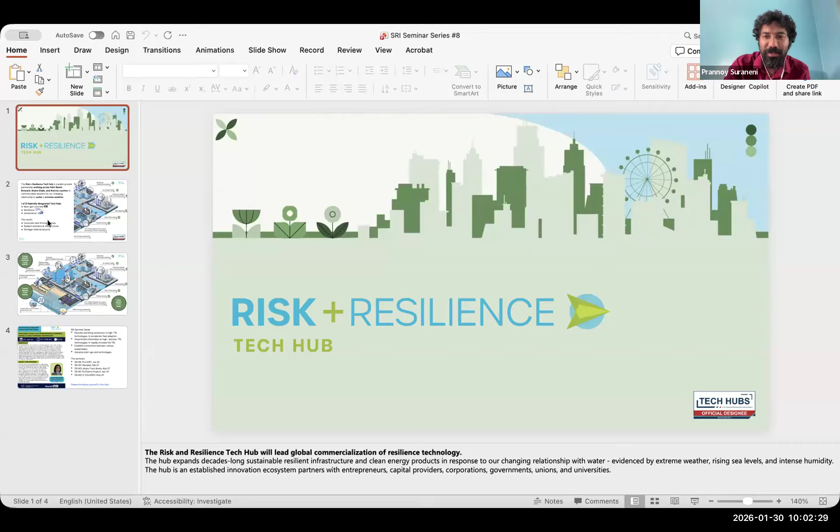Most of you know this quite well by now, but just in case you don't, the Risk and Resilience Tech Hub is a public-private partnership working across the four-county area. The idea is that we commercialize solutions to our changing relationship to water and extreme weather. On the right, you can see the areas the Tech Hub works on, a lot of it related to reducing barriers to adoption of technology such as resilient concrete, advanced materials, clean cement fabrication, wall of wind testing, and providing testbed services. It's one of 31 federally designated tech hubs, and the projects and leads are given in the slide here.

Ultimately, this is all about economic development. I want to clarify that this isn't a research project per se, but also to develop our workforce to result in good jobs, thriving startups, a resilient economy, and stronger national defense and security. This is a broader picture of what the Tech Hub is interested in, with a number of things related to concrete, coastal, and energy efficient buildings. If these interest you, come talk to us, come work with us. We're always happy to assist and to make connections, and we're always interested in growing the South Florida ecosystem and economy.

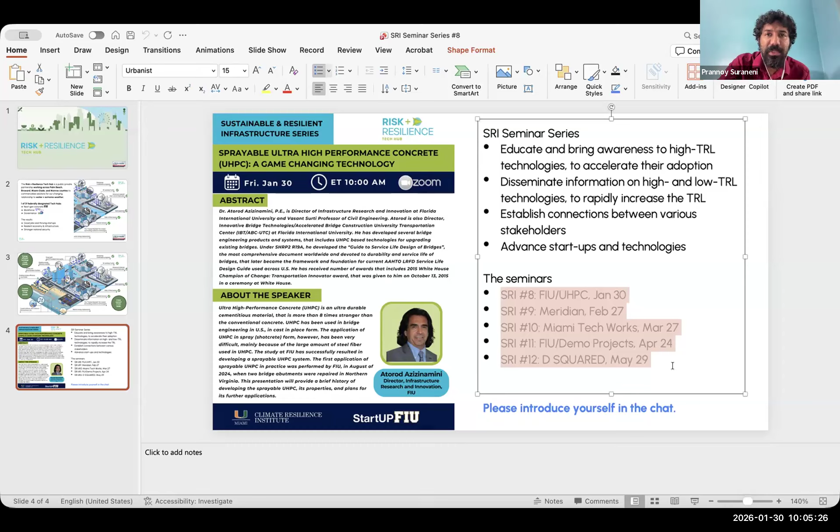All right, thank you, Prannoy. So I hope to show you my slides in a minute. What we are going to discuss is sprayable UHPC in detail, but I'd also like to give you some background on ultra high performance concrete, what it is, then go toward the applications, the properties, and then the sprayable UHPC, to give you the story of what UHPC was and how we got to the sprayable UHPC, which is really game-changing technology in my opinion.

At the end, I'd like to leave time. Actually, I'm going to watch my presentation time because I like to have some time so that we can have some dialogue. I'm pretty sure there's going to be some questions, and I will do my best to answer. If you don't get a chance, I'm going to leave you my email address and contact information, so by all means, please reach out.

Now, UHPC, ultra high performance concrete, has probably had more application outside the US, especially in Europe, and now in countries like Malaysia, and I will show you some applications. So before I dive into the material properties and so on, which is going to lead me to the sprayable UHPC and the 3D printing and all that, I wanted to show you where it's been used.

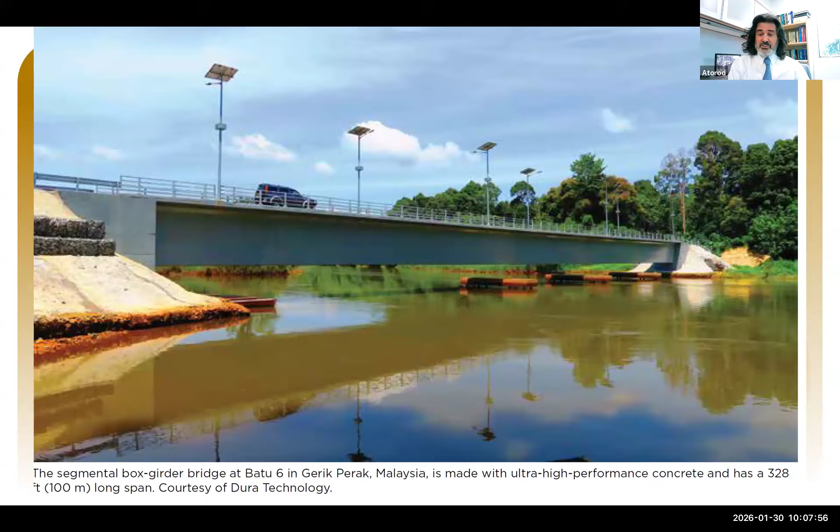Malaysia, actually, believe it or not, is one of the countries that have used UHPC quite a bit. In fact, Dr. Voo, who owns a company in Malaysia, told me just about a month and a half ago that they have constructed more than 400 UHPC bridges, which is really mind-boggling. I think they've constructed more UHPC bridges than anybody else in the world. This is one of them, a long one, 328 feet long girders. So how they transport that to the site is a very interesting question.

In the US, the Federal Highway Administration actually has an interactive tool, and I'm going to give you the PDF copy of all my presentation. You will see a link to the US DOT map that shows data by year. You can plot the data in different forms.

You can see how many bridges have used UHPC in one form or another. Sometimes it's just closure joints, sometimes it's for minor repair, sometimes it's just a whole girder, sometimes it's a deck and so on. I don't believe the FHWA is even able to keep track of it anymore. After 2015-16, it really just blossomed, so it's everywhere basically.

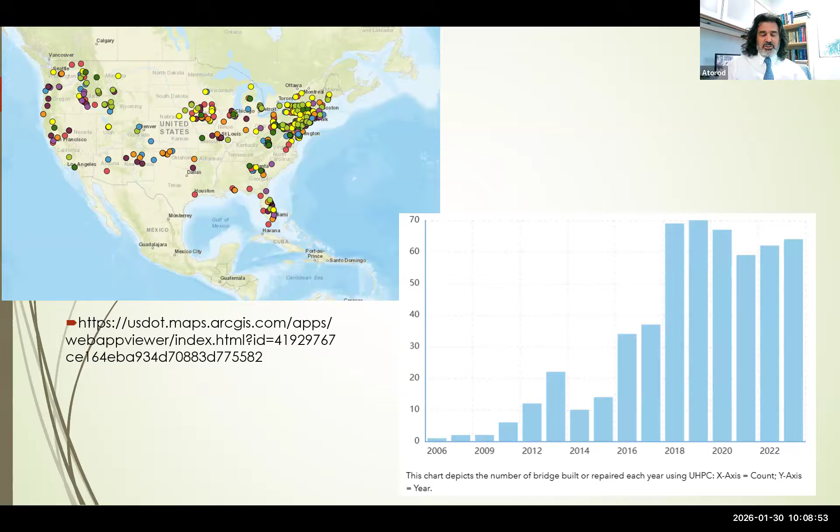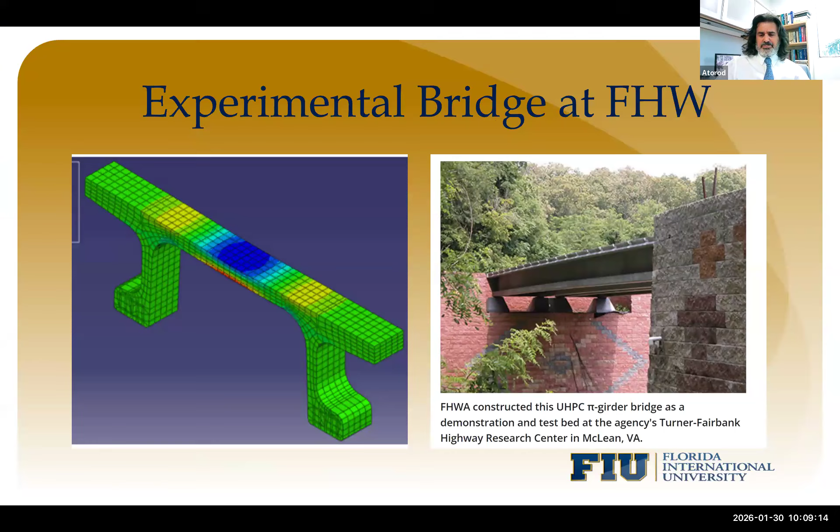Back in 2006 or so, it was like a demo project, but not anymore. If you happen to go to Turner Fairbank in the DC area, there is a so-called Pi Bridge that I think was developed by faculties at MIT. They have that bridge as a demo, kind of. One of the first ones constructed in the US in the bridge area was in Iowa.

UHPC has been used extensively in the bridge area right now, so the bridge owners are very familiar with it. It hasn't really found its application in the building area, even though I think UHPC is going to have more application in the building area than the bridge.

In fact, with the help of two very established high-rise building designers, we redesigned an existing 42-story building that was designed using conventional concrete. We redesigned it using UHPC, and there is significant economy. The size of the shear wall, the column size and things like that goes down. More importantly, the total weight goes down, the foundation size gets smaller. When the size of the columns and the shear wall gets smaller, then the rentable space is increased, and the architects and owners love that.

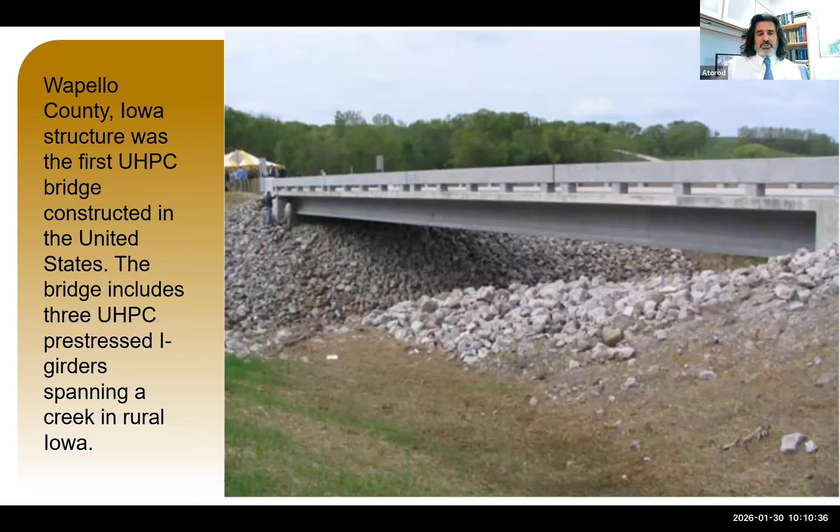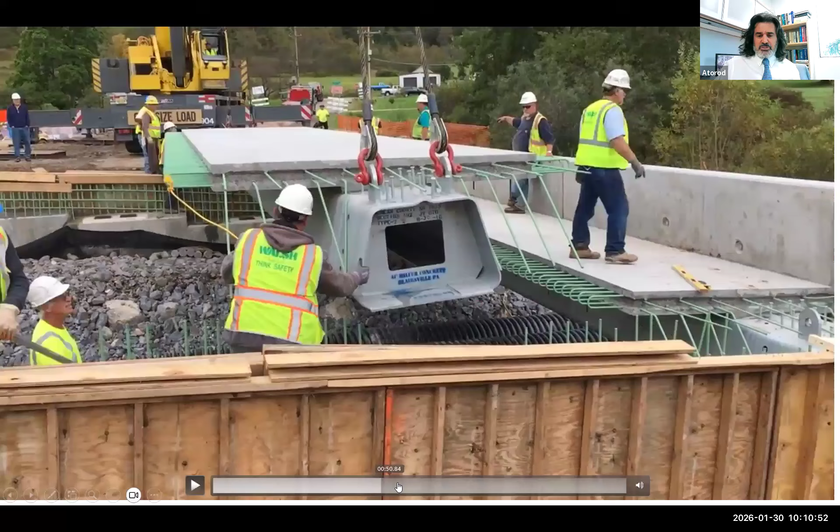So I think it's going to have more application in the building area rather than the bridge, but it hasn't found it yet. In the case of the bridge, it's been used mainly for closure joints. Basically this is the ABC application where you bring this big segment of the bridge that you construct offsite, and then you put them side by side and join them. This is one bridge that we developed, a job in Pennsylvania.

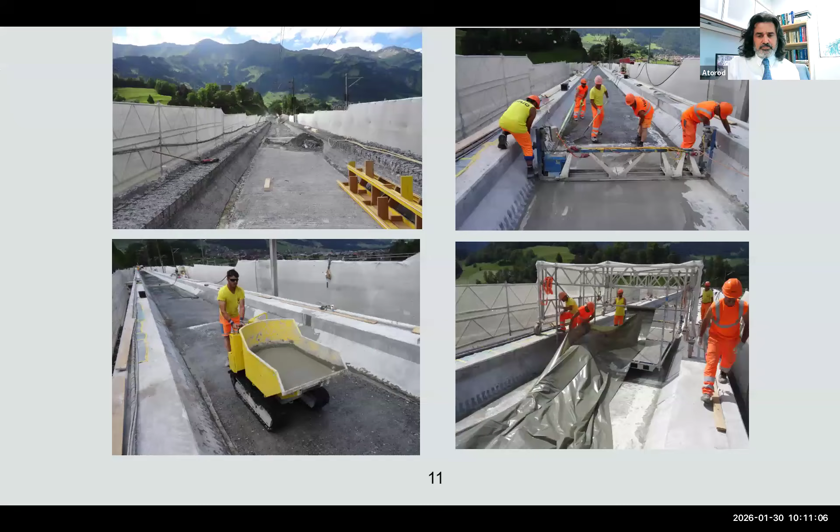In Europe, they have used it for retrofit, the cast-in-place version, not the spray. Cast-in-place - when you wrap an existing bridge or column with UHPC, the end product sometimes becomes even much better than the original structure, because the material is very durable, and we will discuss that, and it is very strong. We are talking about 25, 28, 32,000 psi concrete in 28 days.

I went scanning in Switzerland, because a good friend of mine, Eugen Brühwiler in Switzerland, is one of the pioneers in the UHPC area, and he showed me some photos - for example, the one on the left-hand side is a liner. They put a UHPC liner, and it's basically stored in hazardous material. It's very flowable - you can see it's very flowable. You don't need to vibrate it or anything like that. This is a cast-in-place application.

We're going to discuss the sprayable version, which is really the game-changing technology, like we said - retrofitting the columns, things like that. There's a tremendous amount of application. So let me give you some introduction to it.

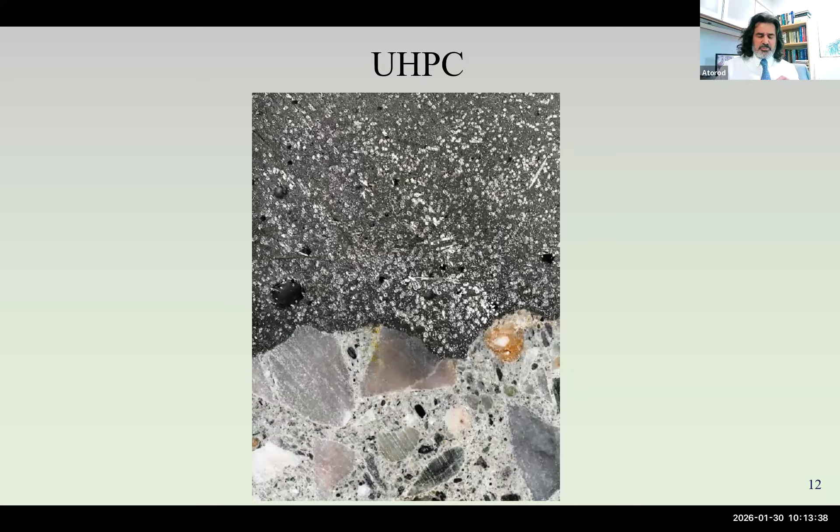Very strong. About a year and a half ago, Hyperfiber, who provides the steel fibers in Detroit, Michigan, added a little bit of a dent on the steel fibers, but previously it was just smooth. There is a reason why it shouldn't be like a hook at the end, and so on. If there's time, we can elaborate on that.

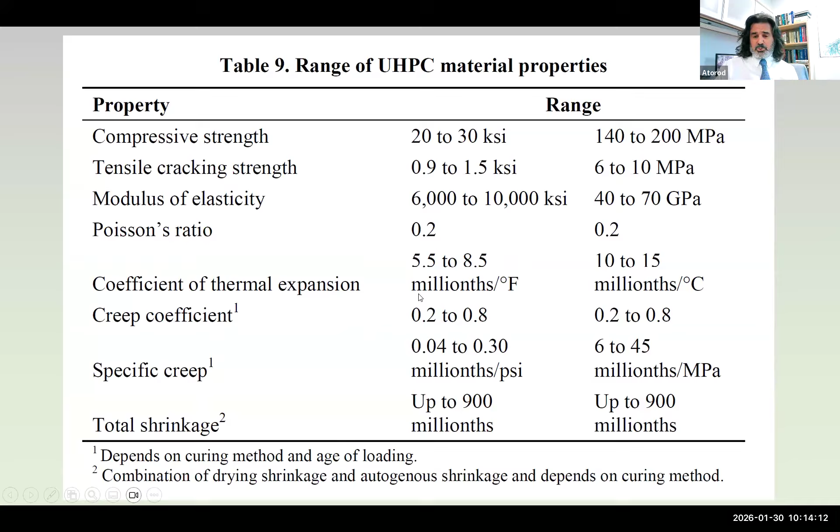Properties - again, I'm going to give you a copy of the slides, I'm not going to go through everything, but look at this: the tensile capacity is very high, compressive strength is very high. There is shrinkage involved with this, a little bit higher than conventional concrete. Specific creep is a little bit lower, which is good because there's not that much water in it. Thermal expansion coefficient is a little bit high compared to conventional concrete. So I'll give you some properties, you can look at it.

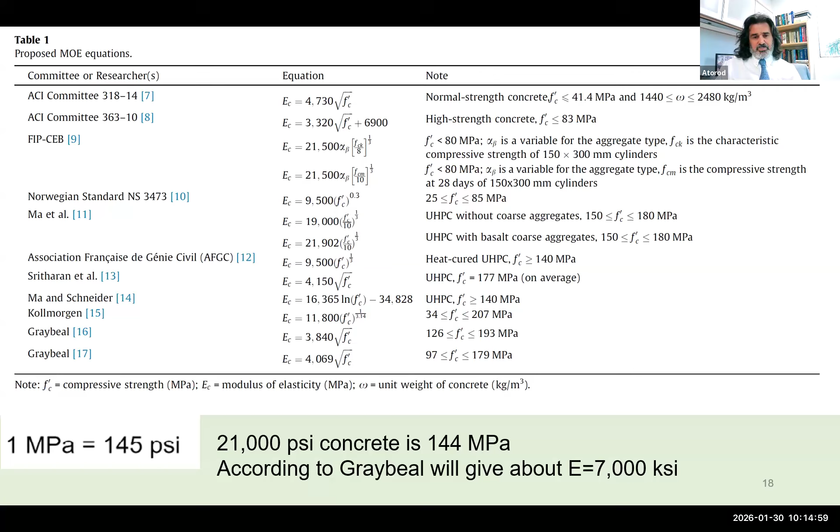One of the main aspects of UHPC is that its modulus of elasticity is very high. You can actually measure the modulus of elasticity if you want to apply it to a building. If you measure it, it's going to be higher than what some of these equations around will give you. We're talking about a modulus of elasticity of like 9,000 KSI. So when it comes to a building, the drift of a high-rise building is very important, and the modulus of elasticity plays a major role. That's where the major advantage of UHPC comes in for building applications.

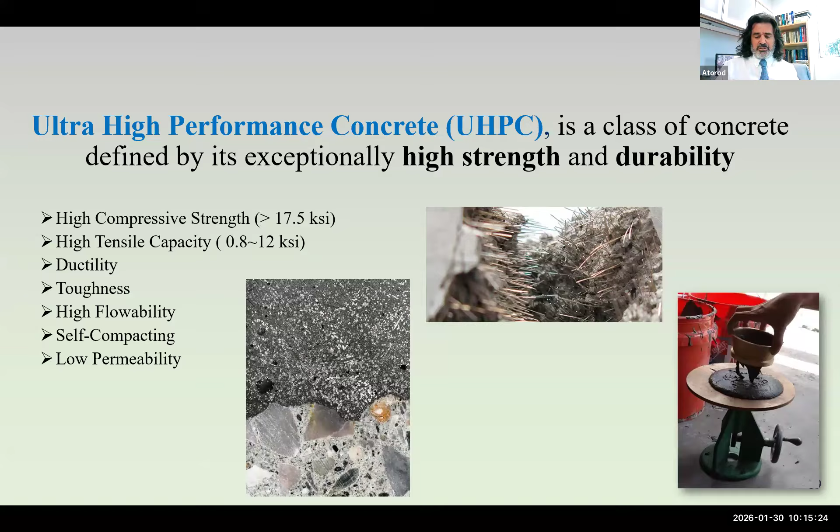In the US, according to the Federal Highway Administration, we define UHPC as a concrete that has good tensile capacity, post-cracking capacity, and a strength not less than 17.5 KSI. That's how it is defined in the US now.

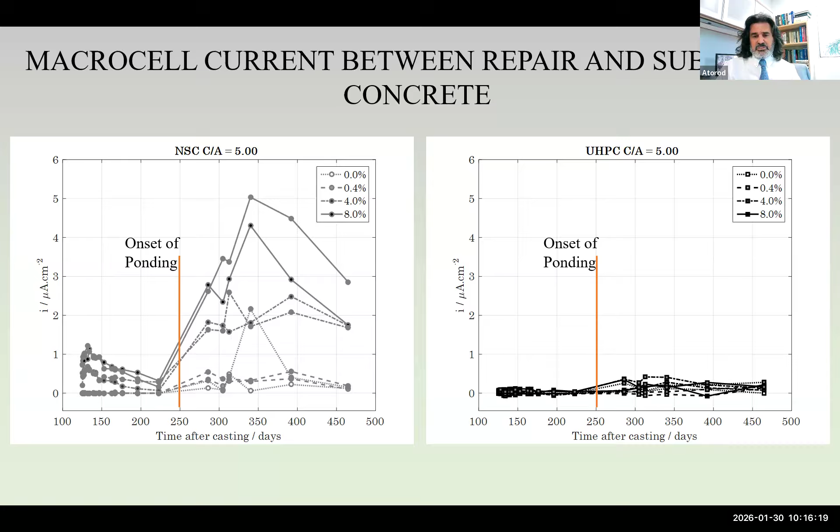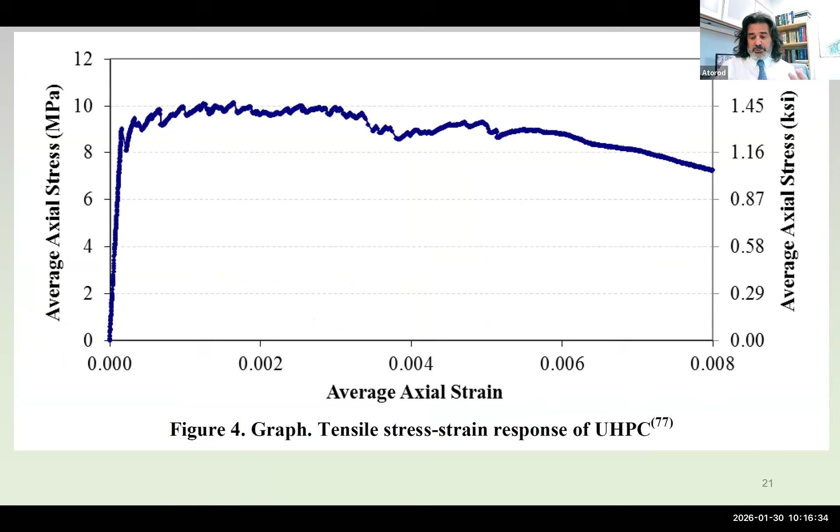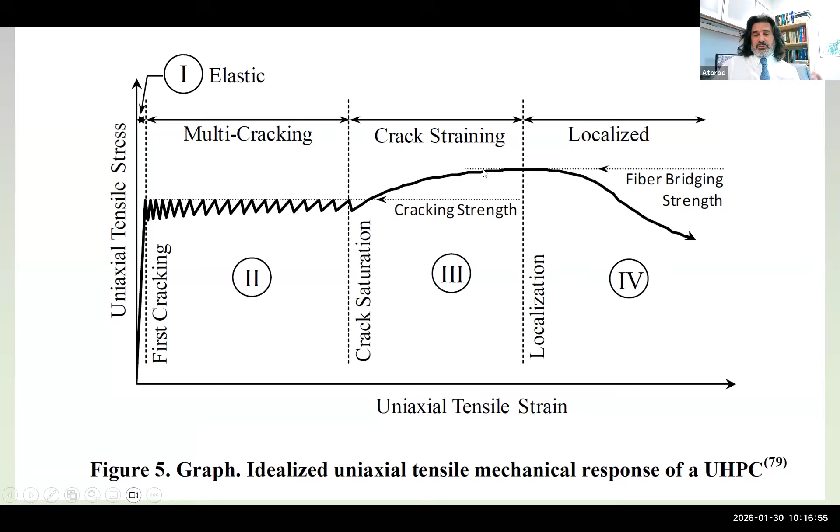The other aspect is that once UHPC cracks, because there are lots of steel fibers in there, those steel fibers hold onto the crack and don't let it open until one crack takes over. Here is a stress strain curve - you can see that once you load it, there are multiple cracks, and then one crack takes over. That's when we calculate the capacity of the section. I can show you here.

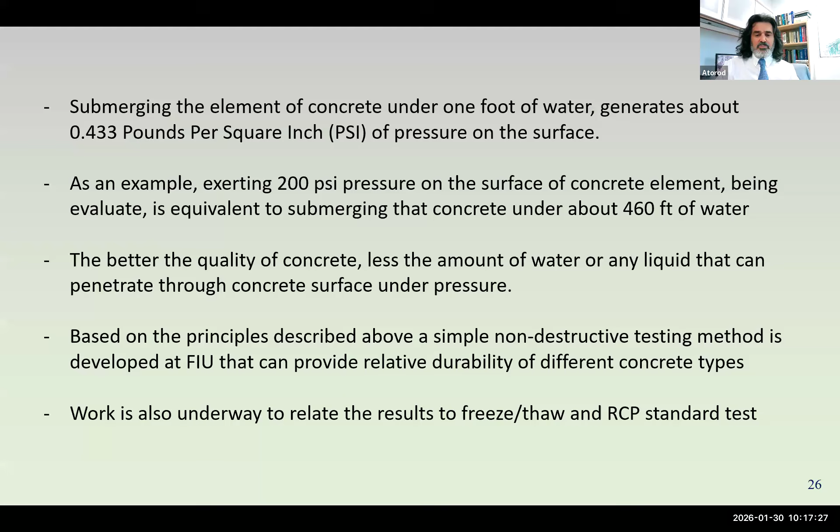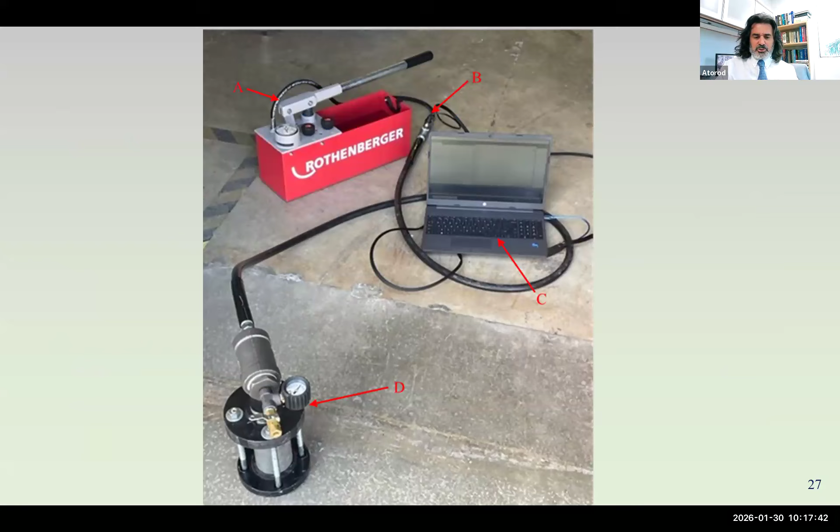Let me give you some idea on durability. We have developed techniques where in 10 minutes you can evaluate the relative durability of different types of concrete. What we do is take a cylinder and apply very high water pressure to it, then watch how the pressure changes over time. If you put a cylinder under 1 foot of water, that creates about 0.433 psi pressure. So if I apply 200 psi pressure on top of that cylinder, that's similar to putting it under 460 feet of water. We tested a cylinder made of UHPC and one of normal strength concrete - take a look.

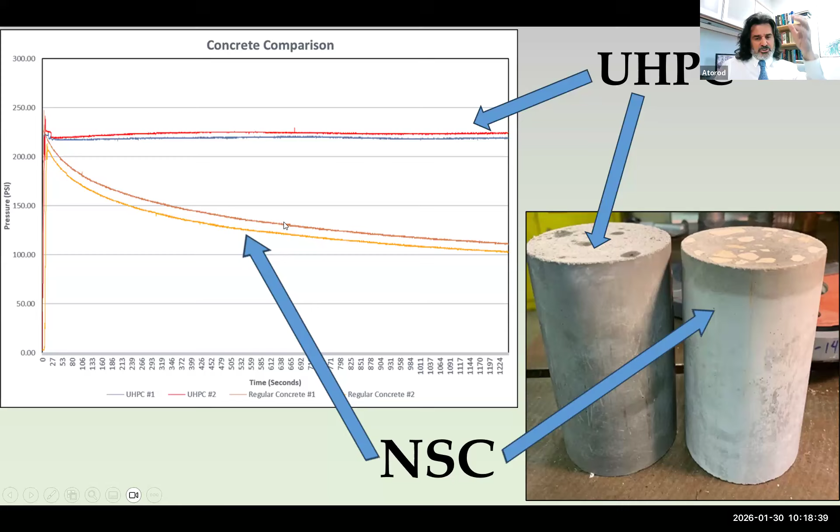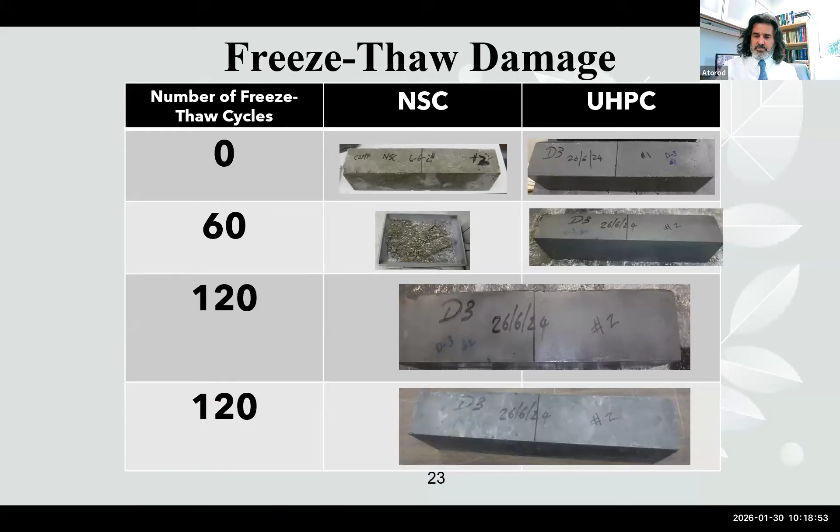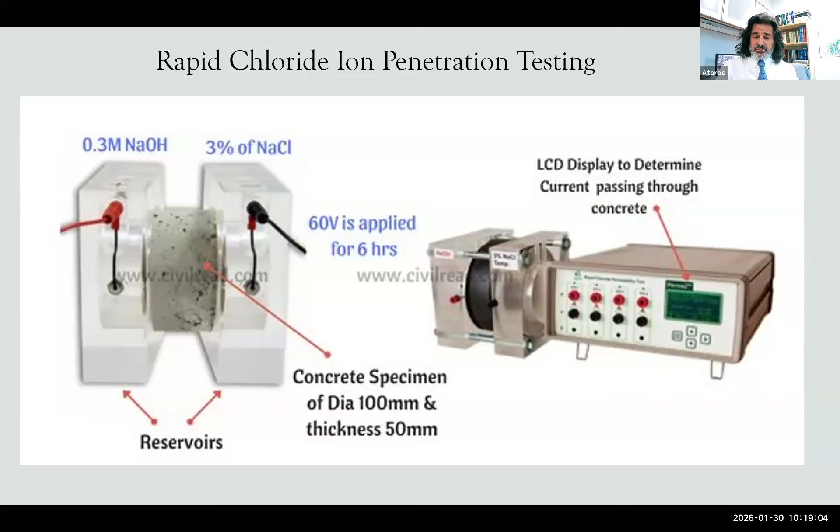With UHPC, you apply 200 psi water pressure, and over time it doesn't change. Whereas with normal strength concrete, the water just seeps through. That's why UHPC is durable. We've done lots of freeze-thaw tests - after even 365 days, 400 days, there's absolutely no change. Now in Florida we don't worry about freeze-thaw, but in the Northeast we do. Very durable material. We've done tons of rapid chloride permeability tests, with basically the same results.

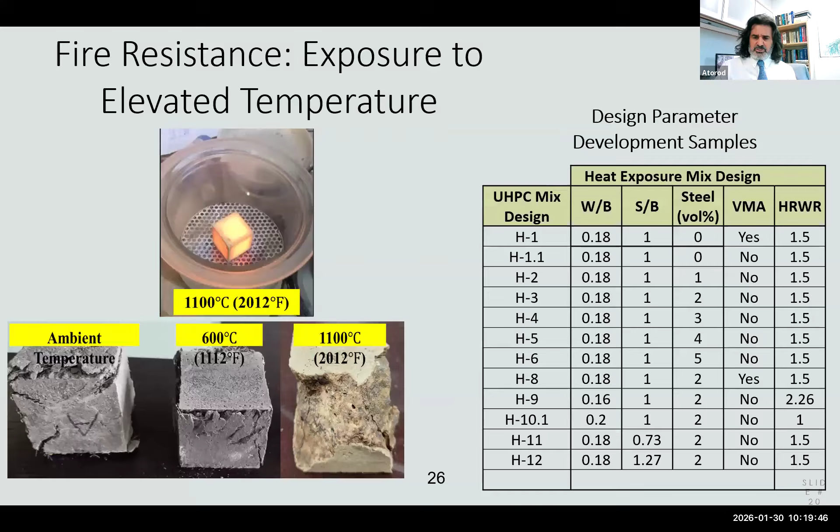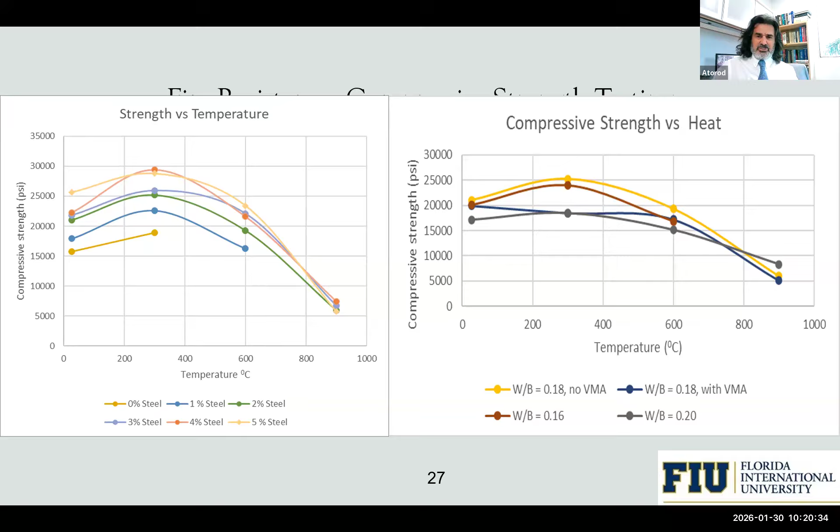We've done a relatively small amount of fire testing. We don't know the mechanism, but if you cook small cubes of UHPC up to 300 degrees Celsius and then do a compressive test, the compressive strength actually increases. But if you cook it more than, say, 800 degrees for a couple of hours and then test it under compression, the compressive capacity does go down. Some of our colleagues in Canada called us and they've seen the same thing. There's some explanation for the mechanism, but the work we've conducted on fire is still relatively small.

There's more work needs to be done in that field. So let me show you some of the applications.

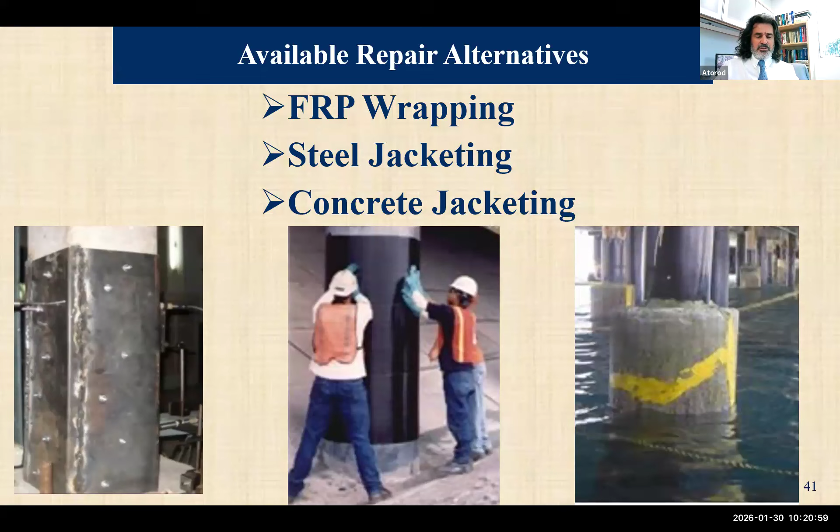Partial repair of the concrete column. We've done tons of testing. There are some ways to repair columns, let's say bridge columns or building columns. You can wrap it with FRP, with concrete, with steel elements. But one way is to wrap it with UHPC. So we've done lots of testing with this.

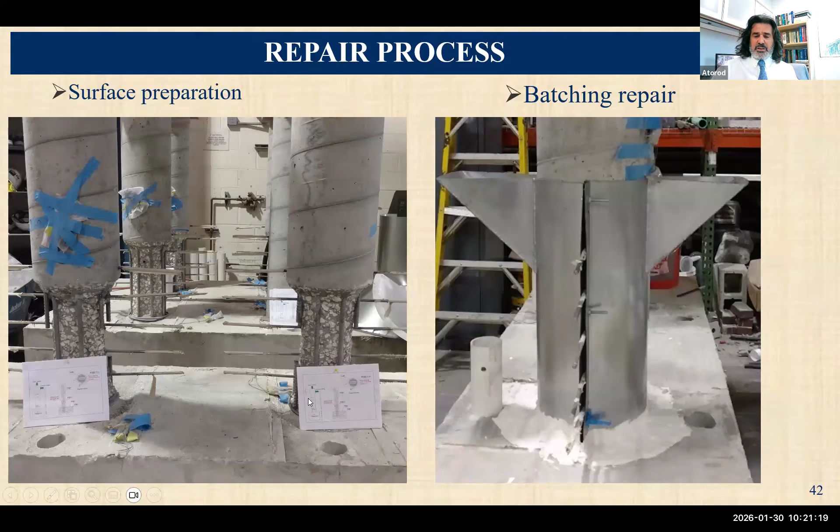One thing we found out is that, for example, you can see some specimens where intentionally we didn't cast the bottom portion, representing some damage, and then we wrapped it with the UHPC. One lesson we learned is that any place you wrap the column with UHPC, if done correctly, you shift the damage above that area, because UHPC is so strong it doesn't let damage happen there. You do get some hairline cracks, but you shift the damage elsewhere, above or below.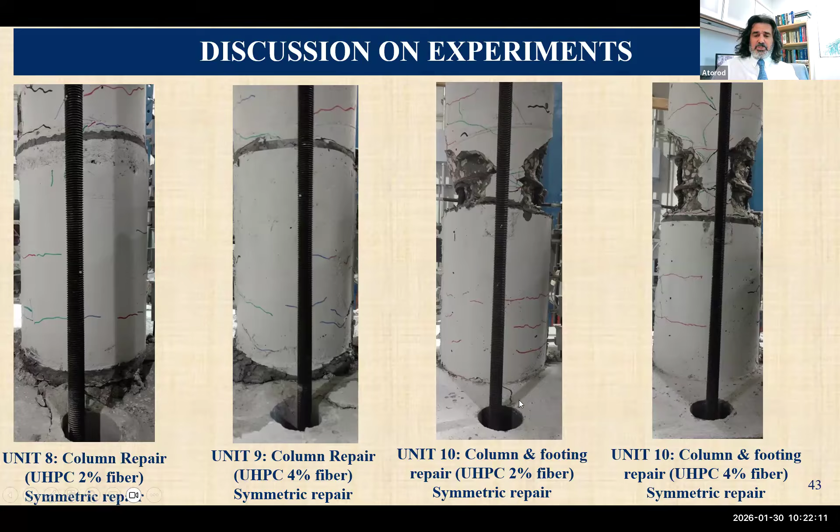That means if you retrofit a column, you also have to retrofit a little bit around the base. If you don't, you see the left-hand side? In fact, we learned it the hard way. In the left two columns, we didn't retrofit the base, and the failure was in the base because that's where the maximum moment is. Then in the next two, we also repaired the foundation, and then we shifted the damage above.

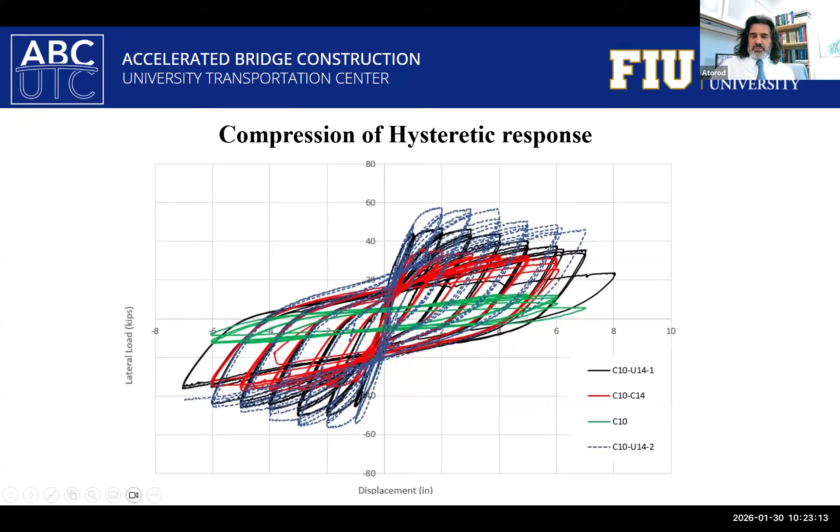So let me show you some results. Here you see a load deflection curve. The green line is a 10 by 10 inch reinforced concrete column. The red one is if I wrap it with normal strength concrete, a couple of inches. And then the black and the blue are if I wrap it with UHPC. So you get the ductility, you get the strength, very nice behavior.

One very interesting work we are just starting is on steel columns in buildings or bridges that need to be retrofitted, maybe due to corrosion, or maybe the function of the structure is changing and you need to beef it up. So what we're trying to do is take a steel column—this is actually a test specimen we're going to be casting very soon.

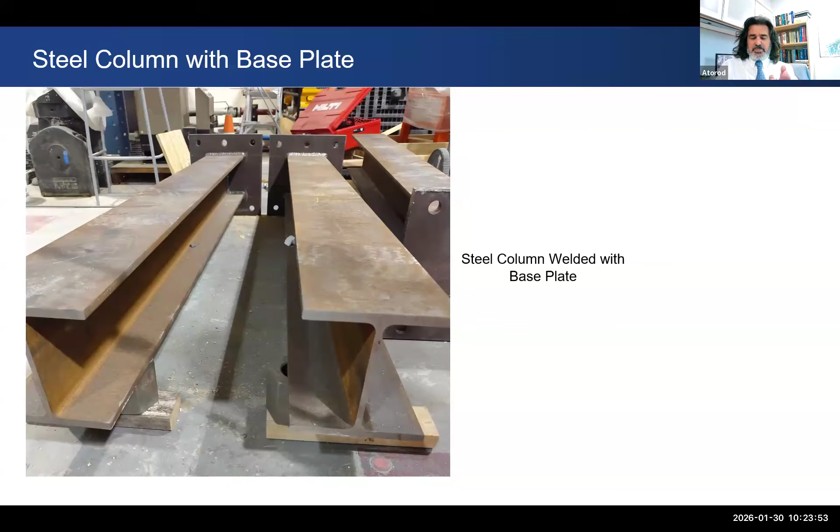We are going to spray the steel column with UHPC. But before we do that, we're going to wrap the cross section with the UHPC, but before doing that, we're going to add some longitudinal reinforcement and also some stirrups in a shape that goes around the column. Once it's ready, we're going to test it. It's going to be a very interesting test. We're going to do at least two tests to start: one, cast the UHPC; one, spray the steel column with UHPC after placing the longitudinal reinforcement and stirrups. Very interesting.

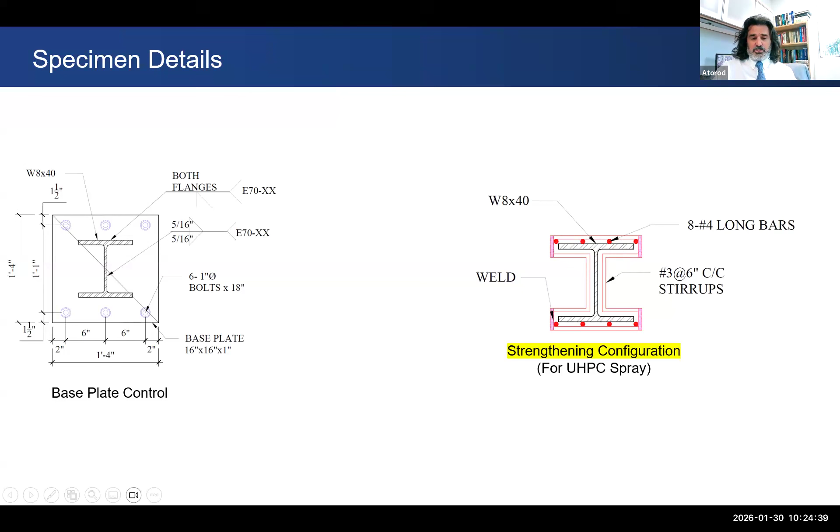I've not seen any work similar to this, but it's coming up. And here is a specimen—the foundation of it is ready to go.

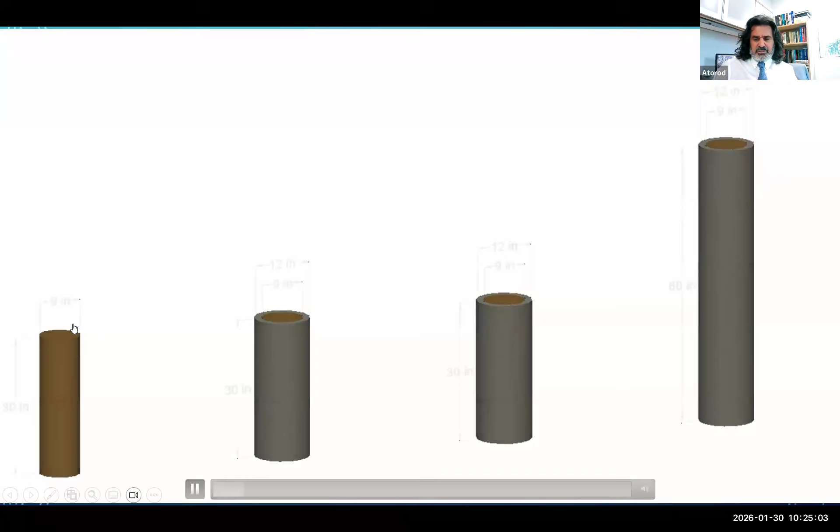Another experiment we've done is strengthening timber piles with UHPC. Again, this could be done cast in place or sprayed. We took, I think, a 9 inch diameter timber pile. When tested without any strengthening, we got in this case 345 kips. Then we wrapped it with 1.5 to 2 inches of UHPC.

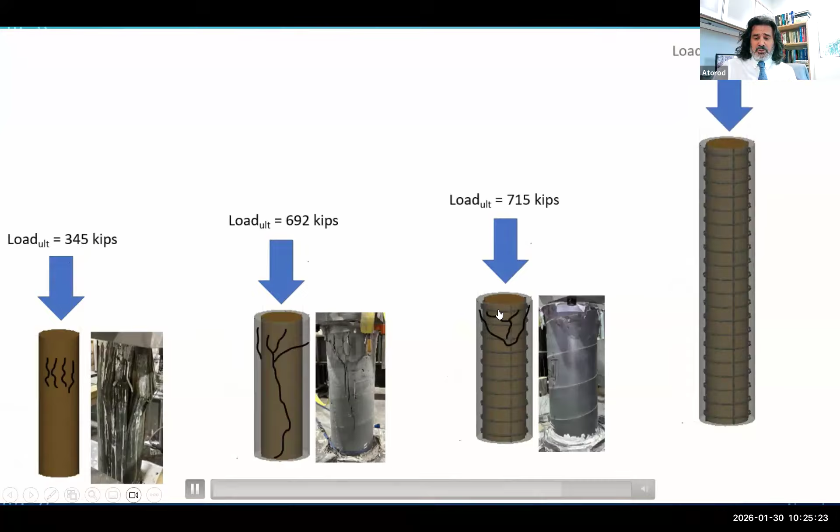With no reinforcement, we got 692. Then we added a little confining reinforcement and got 715. We also looked at the length effect for long columns. So you can see that wrapping a timber pile with just 1.5 inches of UHPC takes you from 345 to 715. So this has an application—we can spray it, we can cast it in place. It's very fast, and it can increase the capacity by 2 times, and you can also use the timber pile as formwork.

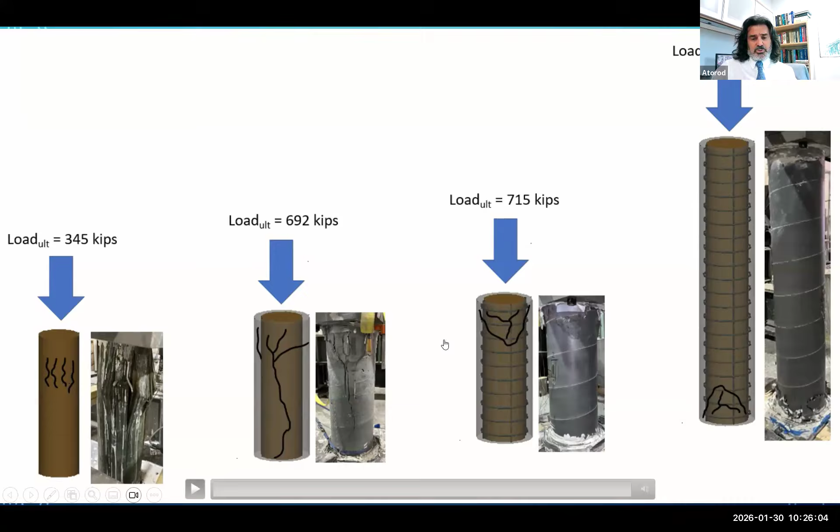And even if the timber piles are in bad shape, don't worry about it, because you can rely on the strength coming purely from the UHPC, not from the timber piles. We've done quite a bit of testing trying to strengthen the beams, the flexural capacity of the beams.

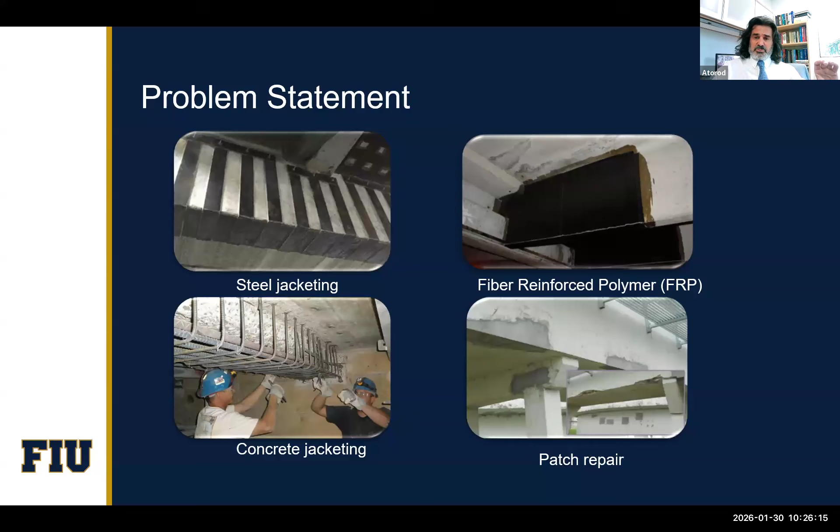There are many ways of doing it, we played around with this 5-6 years ago, more than that actually. We tried to see, okay, if I have a damaged area, what do I need to do in order to get the UHPC to be attached to the normal strength concrete? What we found out is that we tried to put some mechanical devices to give a good bond.

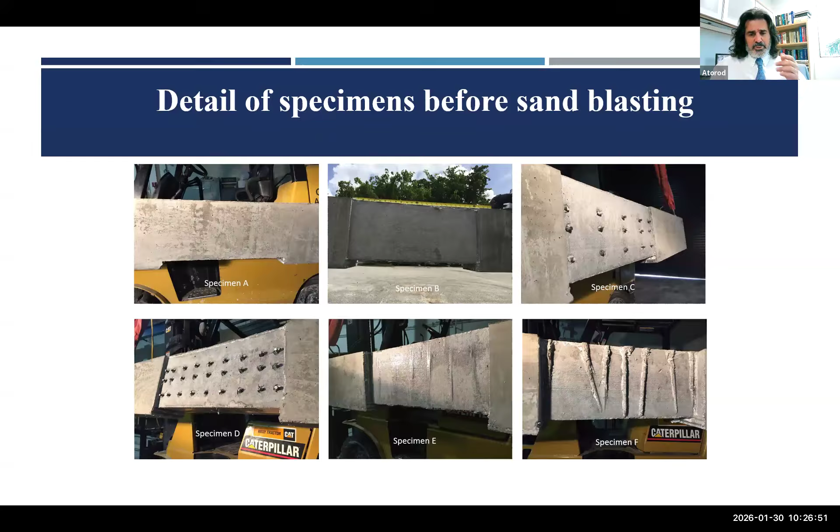There is no need for that. All you have to do is sandblast the area that you want to beef up its capacity, shear or moment, and then expose the aggregate before you spray or cast in place. Make sure the surface is wet, and that's all you need to do.

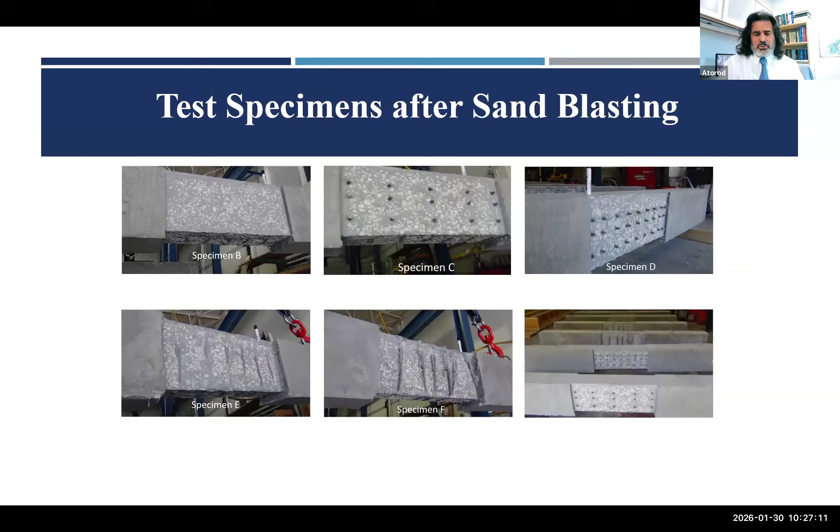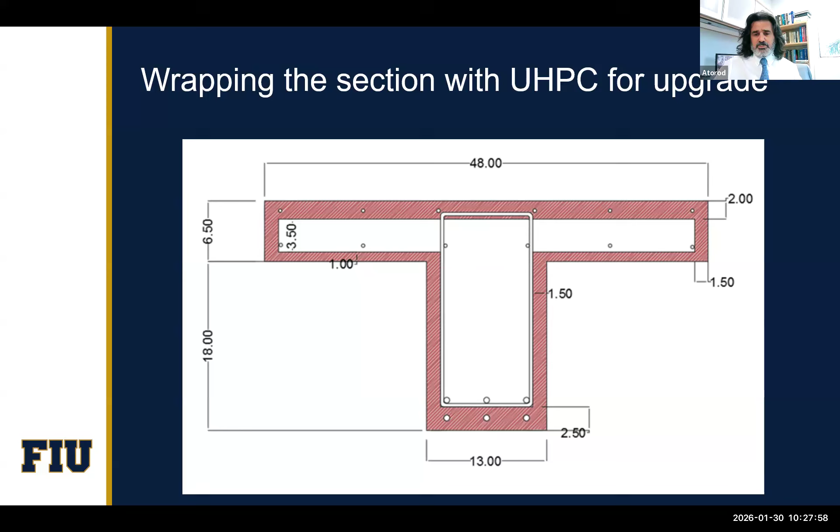Another very interesting one, we took a T-beam and wrapped it with the UHPC. This T-beam represented a Venetian causeway girder. We wanted, because at the time this was several years ago, to show that the cheaper way to fix the Venetian causeway bridges is to wrap it from the bottom. We can spray it with UHPC, and from the top we can cast in place, and that adds quite a bit.

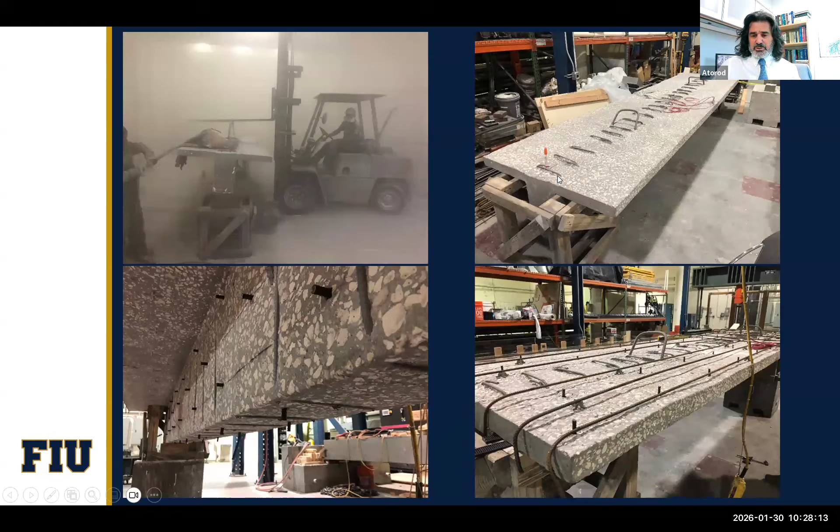So we did an experiment. We took a T-beam, you can see it here, and then we put some additional reinforcement. Here is a T-beam, we sandblasted it, put additional reinforcement, and then put in plexiglass formwork, and I can show you here.

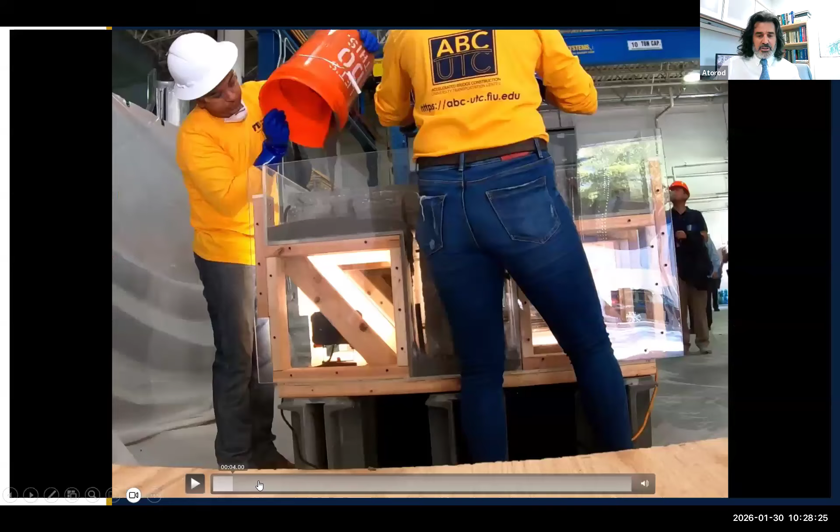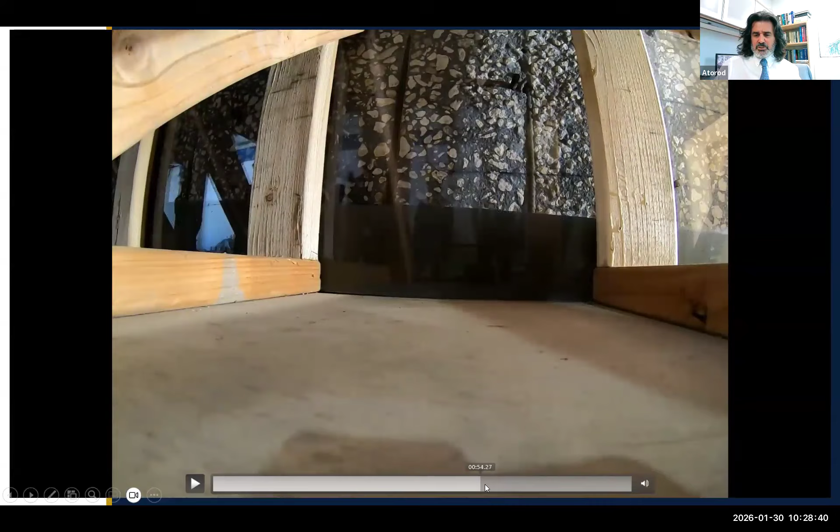You can see we pour the UHPC, and the UHPC flows into a very small area. You can see it was a glass formwork, so we could see it very nicely. No honeycomb, nothing. You can see how it flows. There's no need for vibration, nothing. And then we tested it.

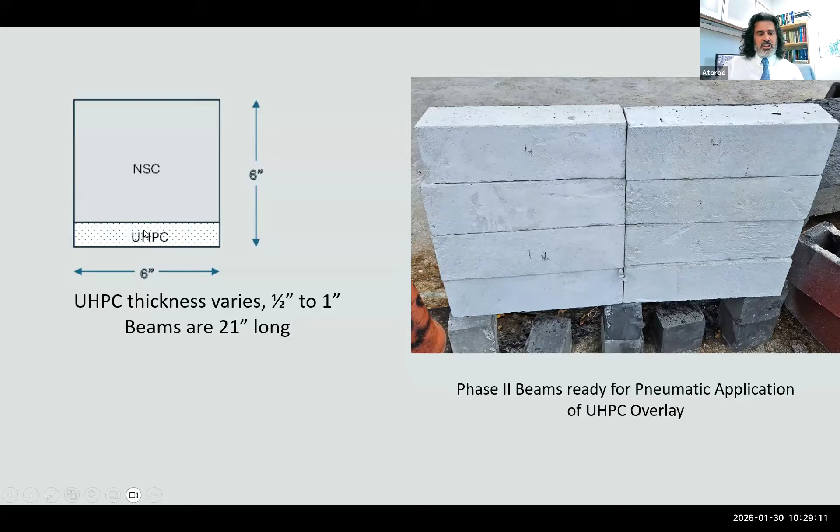Now, coming back to sprayable UHPC, we've done quite a bit of testing to understand the properties of structures that are sprayed with UHPC. We took some small beams, ASTM size, standard ASTM test, and cast in place or sprayed UHPC onto them, then did the flexural test by putting the bottom in tension. You can see that the modulus of rupture or tensile capacity of the bottom side of the beam, without any reinforcement, goes from about 700 to 1200.

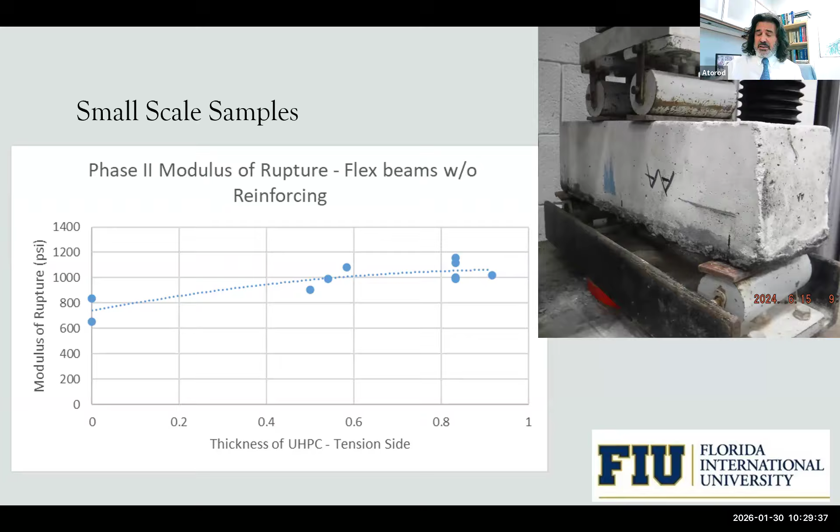This is just casting a very thin layer, about 1 inch, of UHPC, or spraying the UHPC. By the way, there is no difference between them. That can add quite a bit to the strength, the tensile capacity.

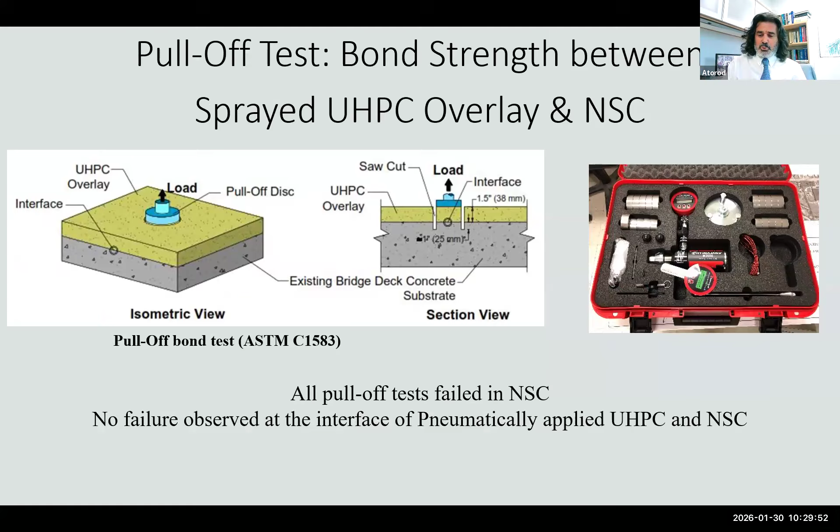We've done direct tension tests. We've sprayed or cast UHPC on top of normal strength concrete, and then done just a pull test. These are some examples of it. I can tell you, we never see the failure take place at the boundary, it's always at the normal strength concrete. There was a couple of cases where the failure took place at the boundary, but the reason for that was because there was still reinforcement, so the surface area was decreased.

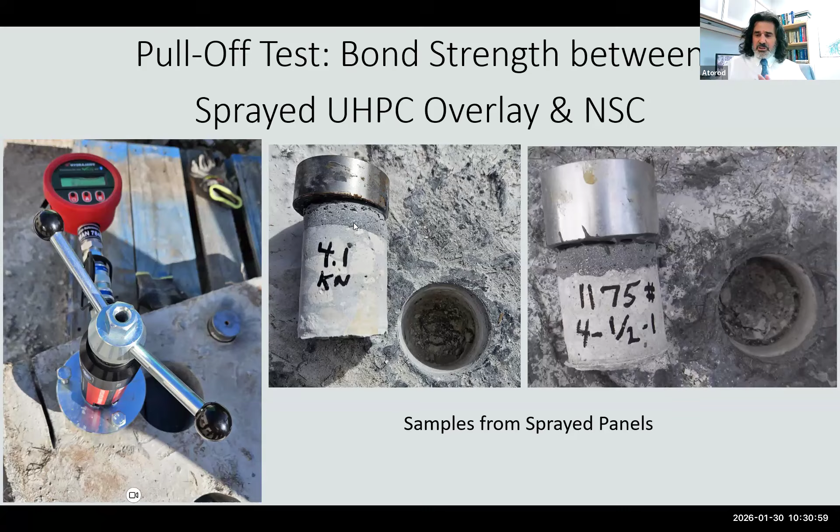But this is something that others have reported too. If you prepare the surface correctly, and at the time of spraying or casting in place, make sure the surface is wet, because UHPC doesn't have too much water in it, the water-cementitious ratio is about 0.18 to 0.2. If you don't keep the surface of the normal strength concrete wet, it's going to soak up all the water from the UHPC, and you'll get shrinkage cracking, things like that. So if you prepare the surface correctly, there is no concern about the bond, which is very good news.

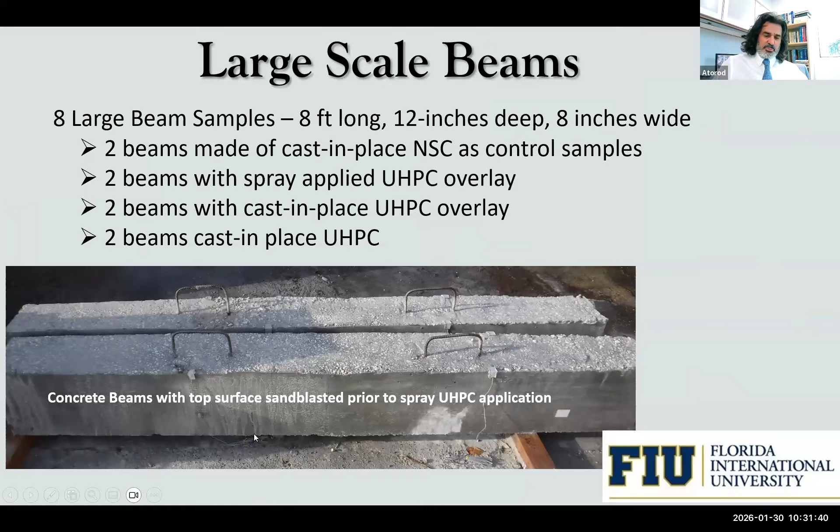We've done some relatively large scale tests, 8 foot long, 12 inch by 8 inch beams, cast the UHPC or spray the UHPC, and then test it under flexure. And these are some of the beams.

Here you can see basically, this is just a normal strength concrete. The capacity was about 35 kips. This is like an 8 foot long beam that was tested under flexural loading, point loading, normal strength concrete, nothing added, but 35 kips.

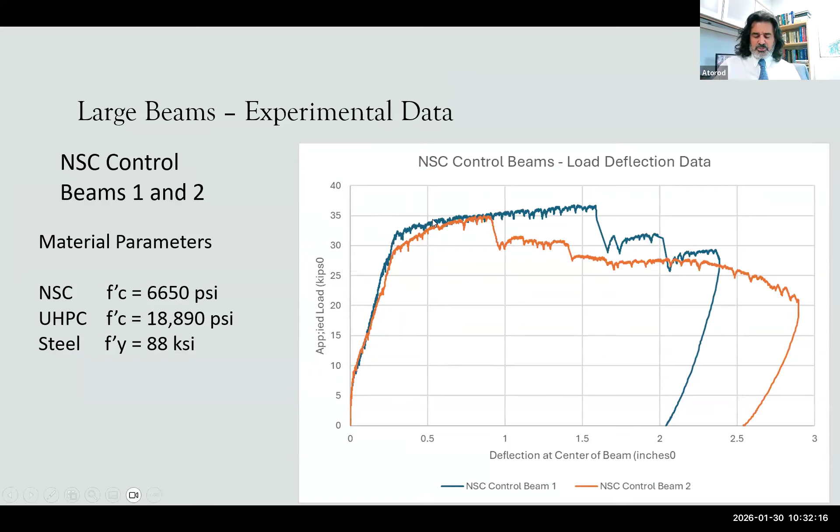Then we sprayed it with the UHPC about an inch and a half, or had a companion cast in place. First of all, there is no difference between the spray or cast, because both give you about 45 kips. In fact, spray gives a little bit higher, and ductility didn't change, but 45. So the capacity increased from 35 kips to 45 kips just by spraying or casting UHPC on the bottom, the tension side.

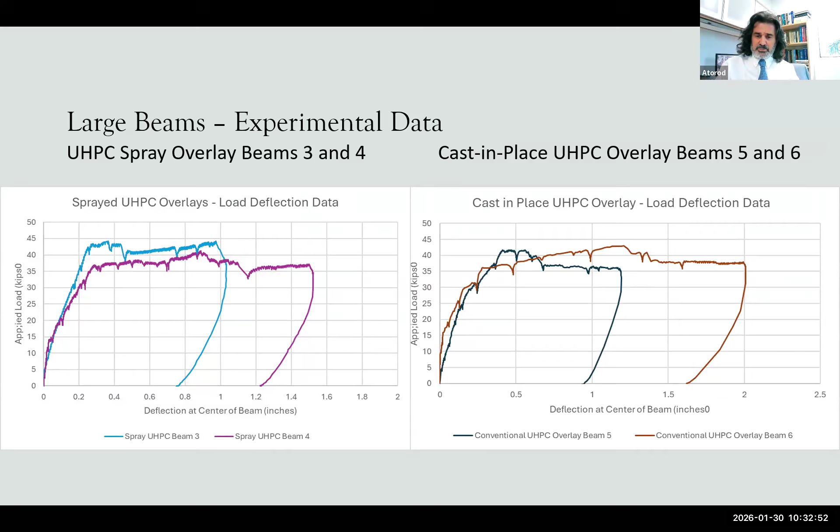The first field application in the US for a sprayable UHPC was done by us in August of 2024. We worked with Virginia Department of Transportation to fix an abutment of a bridge.

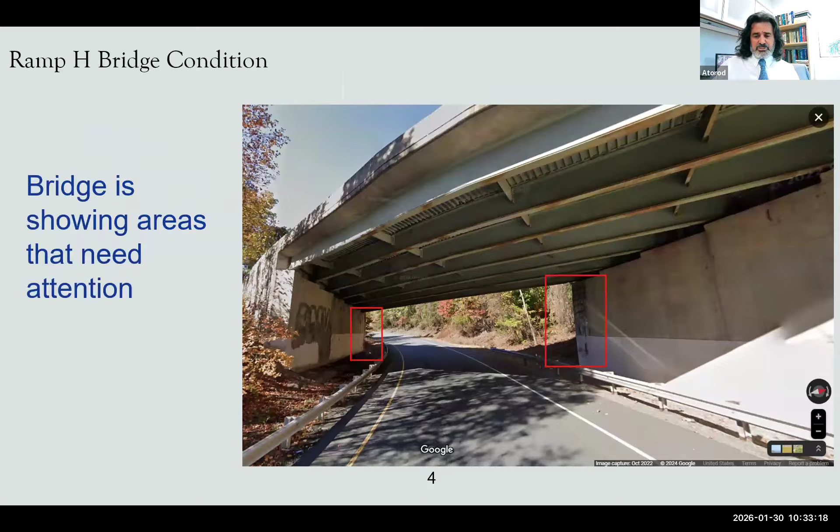This is the bridge, and this is the abutment. Actually we didn't take too much material, but we took all our equipment to Washington, D.C. We took the materials, and you can see from here. And our equipment right now is completely changed.

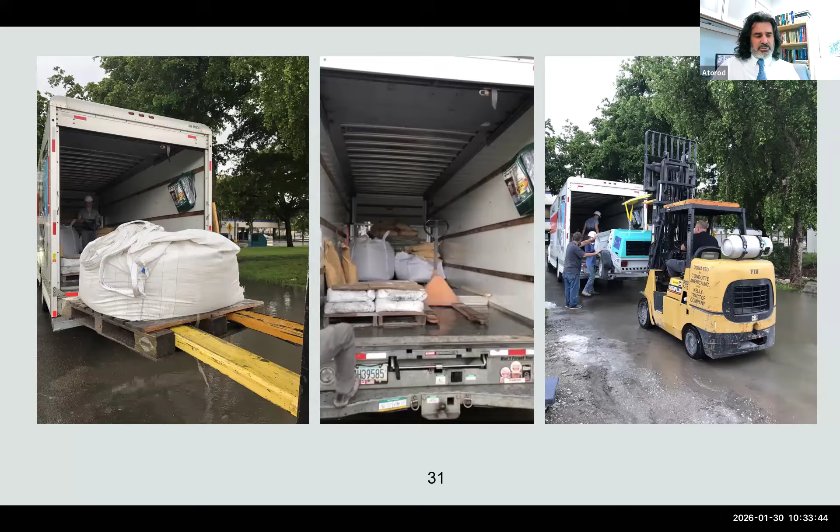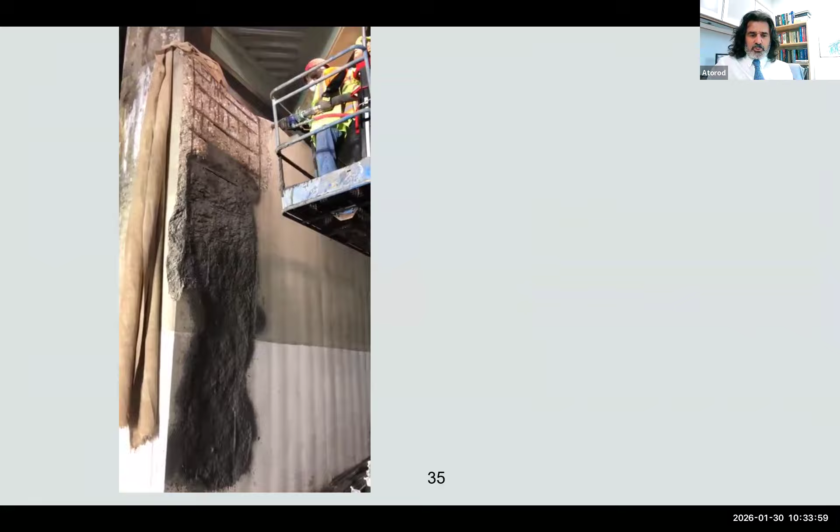The equipment we used in August of 2024 was what I would call a lab version. Right now it's a very sophisticated, heavy-duty construction type. Here you can see the spray during August 2024, spraying the UHPC, and they gave me the honor of being the nozzle man.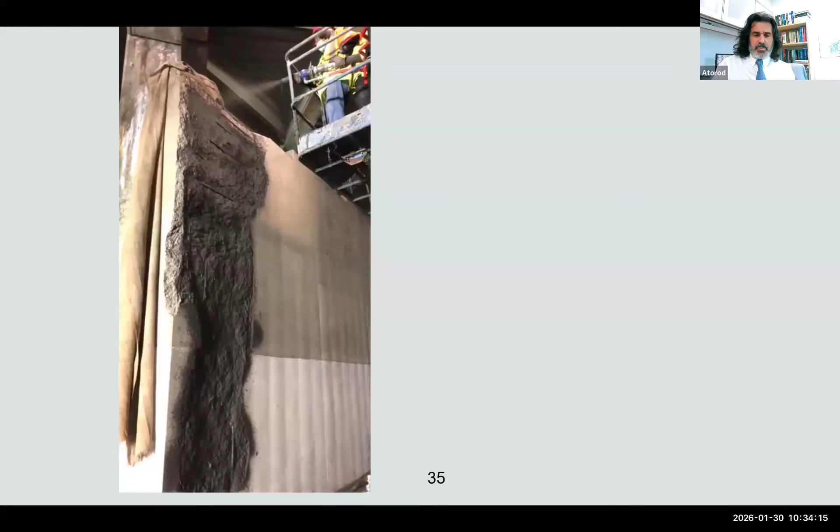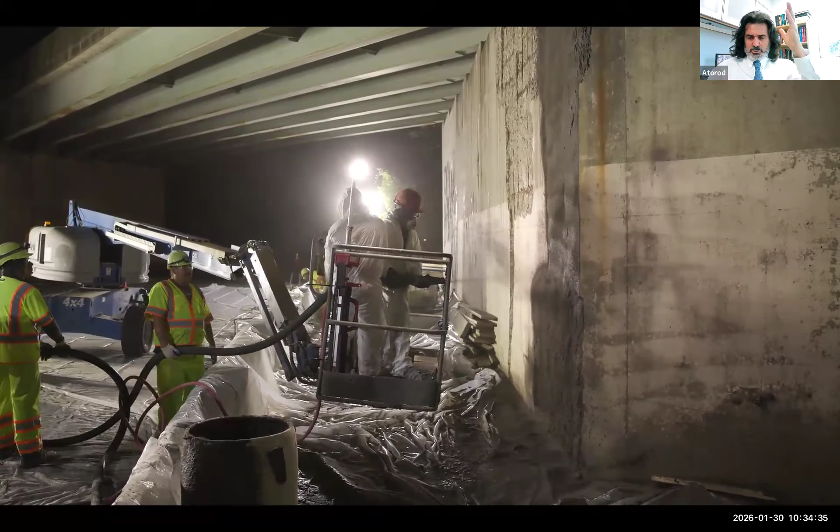Now the spray process is automated. I'll show you. Here is another one. The other good thing about sprayable UHPC is you can go several layers. The way I do it, I go from one end to the other. I wait maybe a minute or two, then go for the second layer. You can go up to a couple of inches, so no need for formwork or anything.

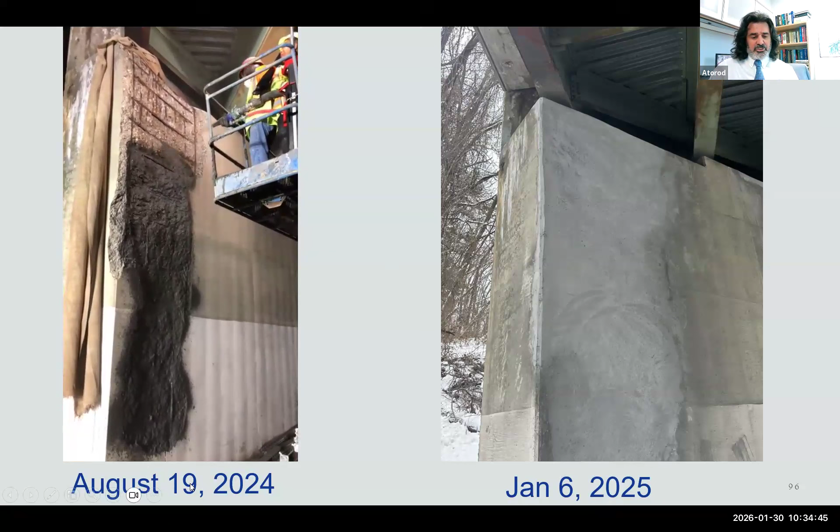Now here you can see the spray, this is August 19, 2024, and this is January 6, 2025. So the end product is very nice, clean, aesthetically pleasing.

We do have two projects coming out with the sprayable UHPC in New York DOT. We are working with New York Department of Transportation and Pennsylvania Department of Transportation to fix steel culverts.

Now here is lab work. You can see that you can spray this, and the UHPC sticks to steel too, very nicely. You can also do overhead spraying with these things.

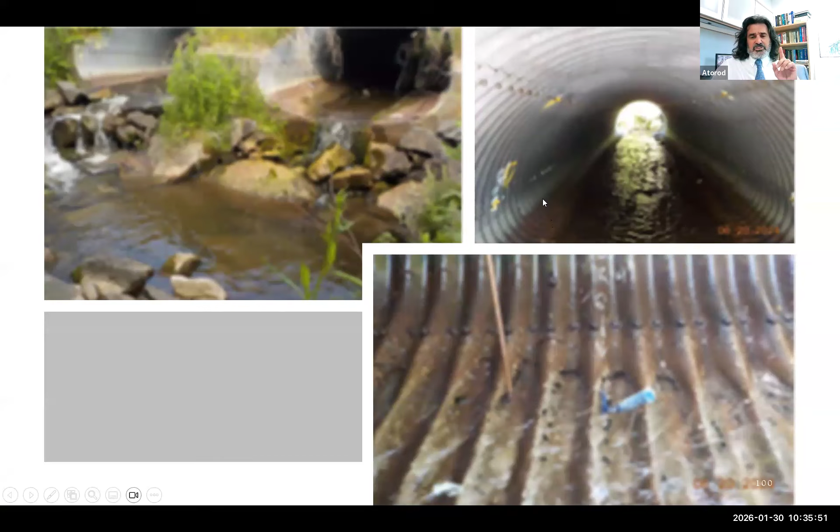The two bridges we are going to be fixing are in New York. Basically we are going to fix the invert, or New York DOT is going to do it. The invert will be fixed by normal strength concrete, and then we are going to roughen the surface. But then we are going to spray the entire 57-foot long culvert all the way around with UHPC. That's coming up in June of 2026.

And then another one is going to be strengthened. It's got a sidewall, and there's no need for the invert in this case, but we're going to be spraying about a couple of inches of UHPC all the way around, including the sidewalls. The spray process is going to be used.

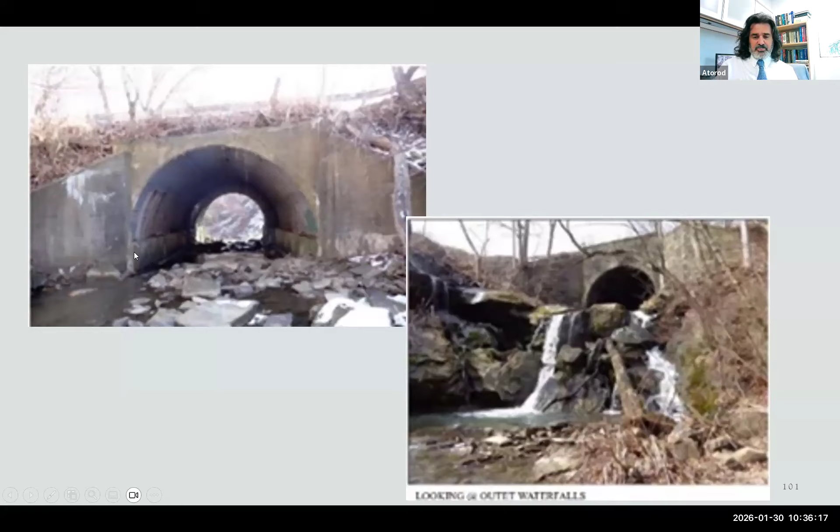This project, by the way, is funded by the Federal Highway Administration's AMR project. We were selected, but the contract paperwork is not complete. This work will be done through FIU. It's a demonstration type project, which also helps the Miami-Dade TechHub, basically the projects that we have.

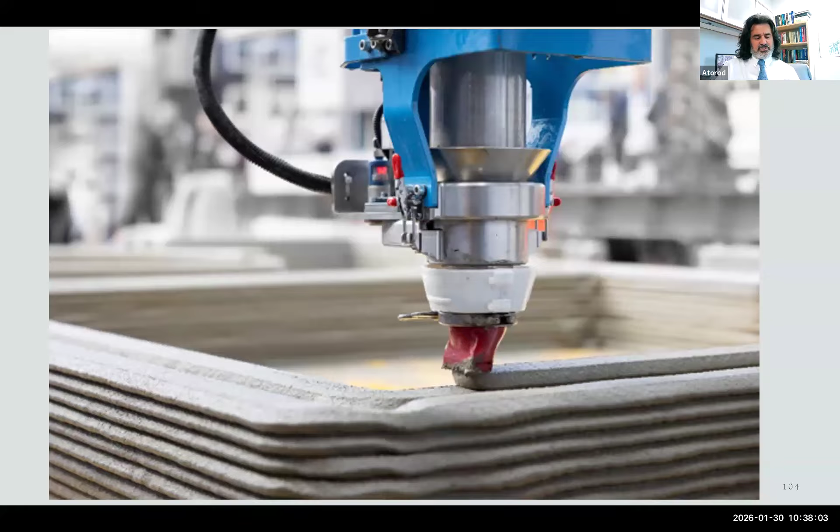I also wanted to share with you the 3D concrete printing that uses the sprayable UHPC. Now, you guys know that layer by layer 3D concrete printing is very popular, conventional. One of the problems with layer by layer is the bond between the layers, and because the cross section is smaller too.

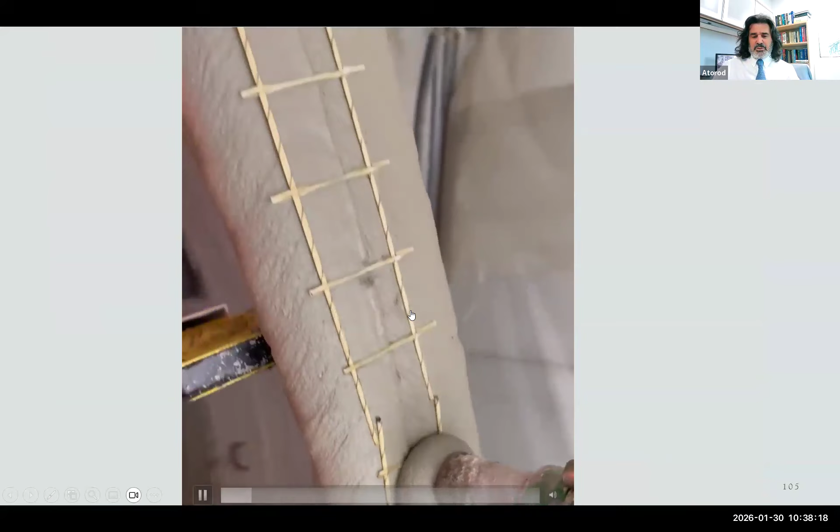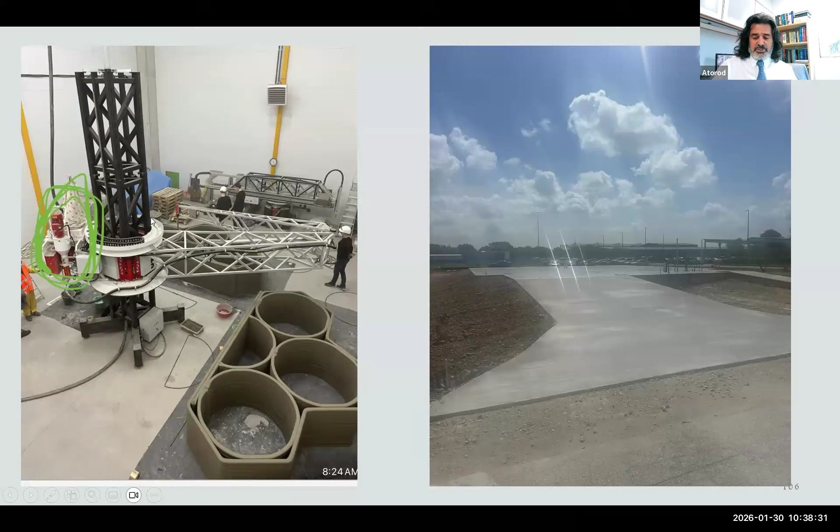So we have purchased this particular 3D printer that can print a full-scale, multi-story building. You can visit FIU and I'll be happy to show you. This printer is sitting on the slab we built, and this is a house that was printed using that printer, actually in Europe, not here.

One application of this 3D layer-by-layer printing combined with UHPC spray is formwork. I can build a formwork printed layer by layer and then spray it with UHPC, which makes it really resilient.

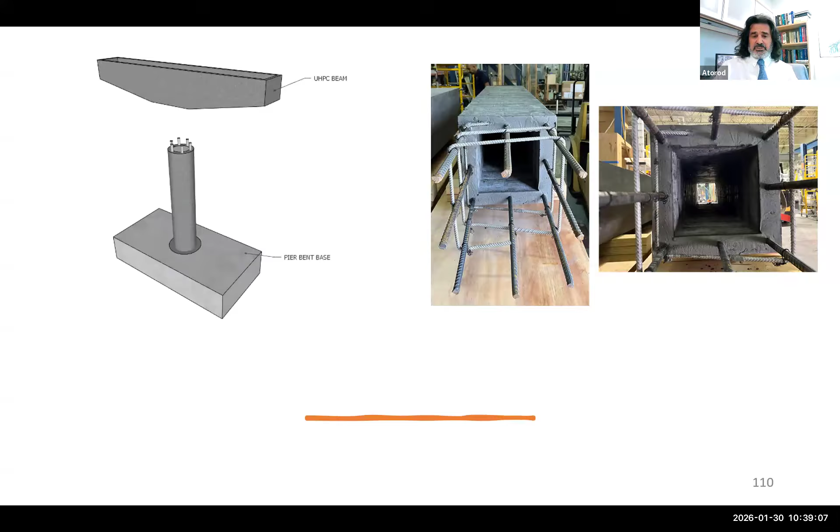So we can spray it to build a formwork or any structure, like a seawall. I think seawalls are going to be a very big application, and we're trying to get our feet in that field because we have a great concept to print a seawall layer by layer and then spray it with UHPC. That will allow us to decrease the section size, make it more resilient against salt water penetration, and make it easier to ship. It's lighter, uses less material, is more sustainable, and more resilient.

That's at the TRL level of 6-7, so it really won't take too much time. I think the resilient seawall system using layer-by-layer 3D concrete printing and sprayed UHPC is going to be a game changer.

Now, upcoming stuff that we have is training. We are going to be training contractors as part of the funding we received from TechHub, for workforce development, technology transfer, and so on.

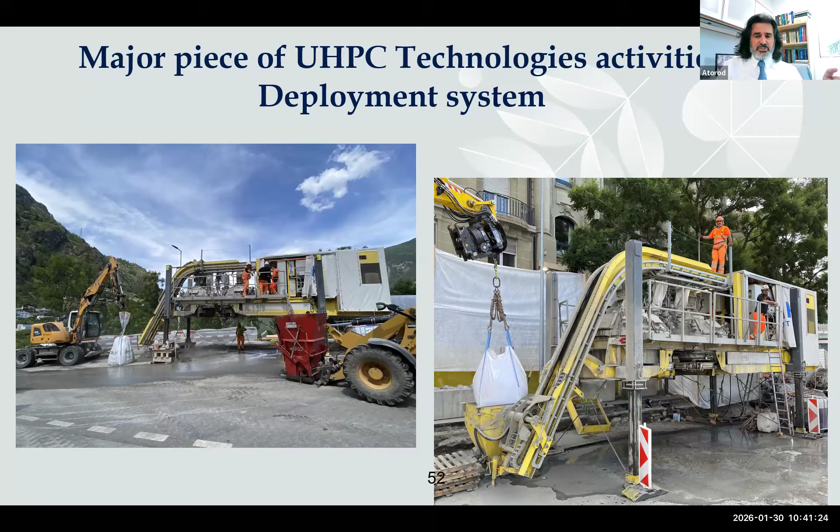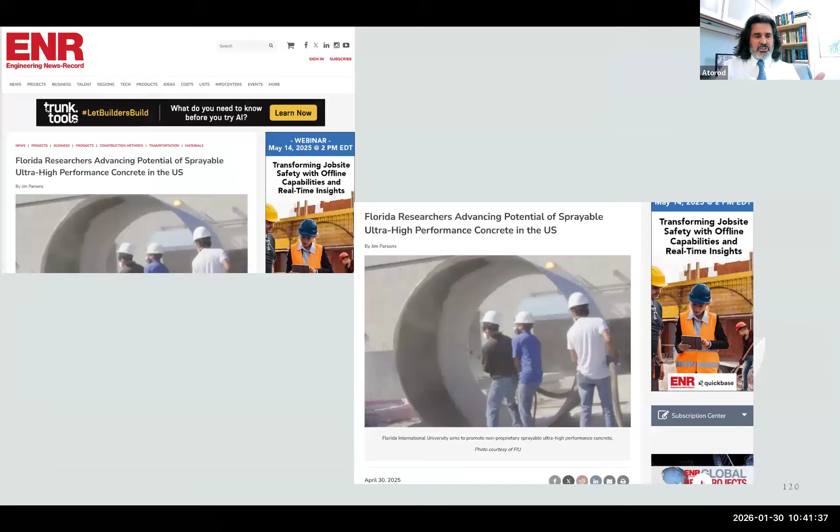This sprayable UHPC has been in the media—I've included coverage from the Federal Highway Administration and some magazines. ENR had a very good article on this sprayable UHPC, and we were lucky that sprayable UHPC was selected as one of Engineering News-Record's top 25 2025 newsmakers of the year.

Lots of people ask us who can provide this sprayable UHPC service. Now we have a startup company called UHPC Technologies. There's a website, and if you're interested, I asked Carlos Rodriguez, who is with UHPC Technologies, to attend this—he's here and could be your contact person. Through UHPC Technologies, the sprayable UHPC service will be provided.

There's a website, you can just type UHPCtechnologies.com and take a look. It provides the service, and very soon it will also sell the material in a pre-bagged portion, similar to something like Ductal—you get all the dry materials and steel fibers, and with the recipe they give you, you can mix it and make the material yourself.

Also, I wanted to share that right here in Miami, at the Hyatt Regency Hotel, December 1st and 2nd, we have our World Bridge Engineering Conference. I don't know how many of you have attended—past conferences were held in 2014, 15, 17, 19, 21, 22, 24, and the next one will be in 2026. Usually about 700 bridge professionals attend. It's co-sponsored by 33 state departments of transportation, and it's a very big event. The deadline to submit an abstract is March 20th.